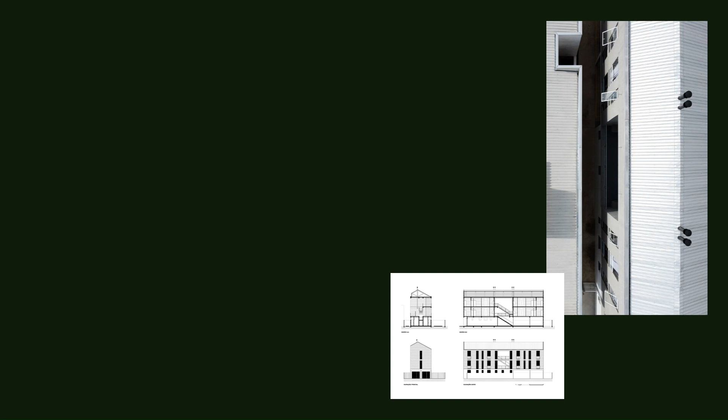The Lapa I Building by Grimpa Arquitetos in Lapa, Brazil. The Lapa I Building was designed from the reflection of its surroundings, not to camouflage it in the landscape, but to let it be affected by the elements present in the local context.

Located 3 kilometers from Parque Estadual do Monge, in the city of Lapa/PR, the project sought since its conception to enhance the privileged horizon of nature. Sky, rock and vegetation extend to the east of the site. These elements were the starting point to create the atmosphere that was intended to inhabit the building.

The verticality of the openings, in counterpoint with the horizontality of the landscape, allows the apartments to be invaded by the framed view. These openings, which function as a kind of sundial, allow the environments to have full sunlight during the day and ample cross-ventilation, ensuring the environmental comfort of the apartments.

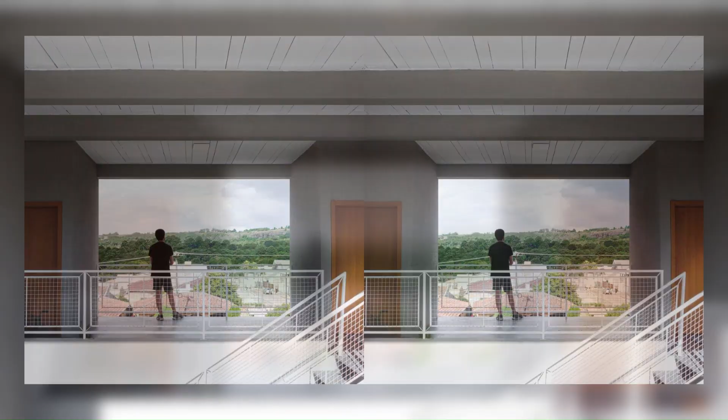Guided by visual contemplation, the community balconies between the apartments encourage conviviality and appropriation of the shared space, besides guaranteeing the privacy of the apartments that do not share walls. This large central void is the project's structuring and connecting core, where some apparent infrastructure and vertical circulation are located, allowing residents and visitors to be affected by the landscape from different angles and heights.

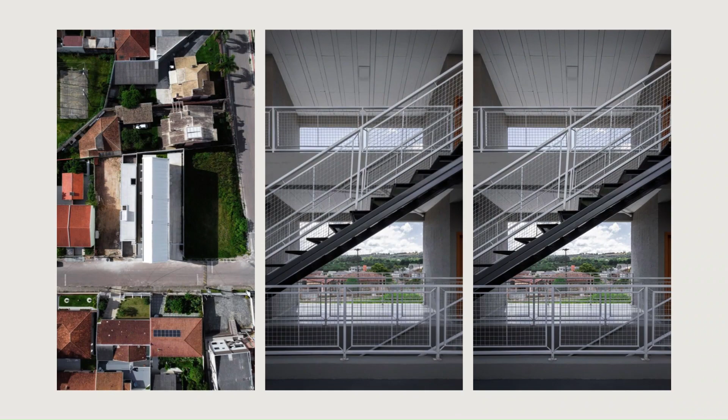On the first floor are located the spaces dedicated to commercial programs. The finishing of this floor, finished in plaster and white paint, has the function of demarcating the formal aspect of the work, the functional division of the building.

The materials and construction techniques were chosen based on what is most common to local labor. Thus, the building is composed of a mixed structure of block walls and cast-in-place concrete, a simple solution that facilitates its execution. The openings from slab to beam avoid the need for lintels and allow the sequential construction of planes for external closures. The gable roof is designed to house the building's water tanks.

The floors of the apartments are made of polished slabs, waterproofed and painted, allowing the residents, if they choose, to apply future floorings of their choice. The final architecture of the Lapa I Building is the result of the interaction between the project and the construction site. During construction, design solutions were adapted to meet the dynamics of the construction process.

As in the external coating of the building, where to facilitate the waterproofing, it was decided to apply a thin layer of texture projected over the blocks that would initially be apparent. The blocks and beams stand out under the coating when exposed to the sun, revealing the materials that make up the construction. The rough finishes were assumed as part of the process, understanding that the technical execution of the labor would be part of the final result.

Finally, the architecture was made complete through the residents' appropriation, the sum between project plus work plus occupation. The spaces with simple and raw lines allow the dwellers a free, flexible, and creative occupation, enabling those who inhabit the space to become agents of the architectural conception process.